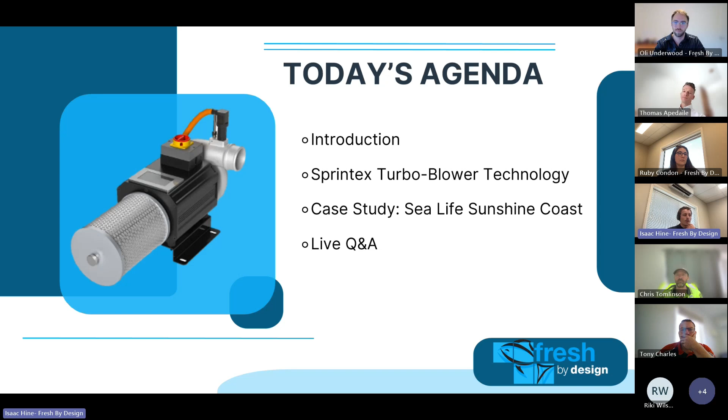I'll give you a quick overview on who Sprintex is - you may not have heard of us. If you go to the next slide.

Sprintex Limited, the company relisted in 2021. We're ASX listed. We specialise in high-speed permanent magnet motors. We come from a hydrogen fuel cell clean energy background, and we looked at that technology. We've done a number of significant pilot projects, but hydrogen uptake is not ready yet, basically. So we looked at the technology we had and thought about possible ways to introduce it to a wider range of applications.

Industrial blowers - commonly people are still using technology from 30 plus years ago, inefficient technology that produces excess heat and consumes oil. We thought we could do something different, something new: smaller, lighter, more energy efficient, and less maintenance.

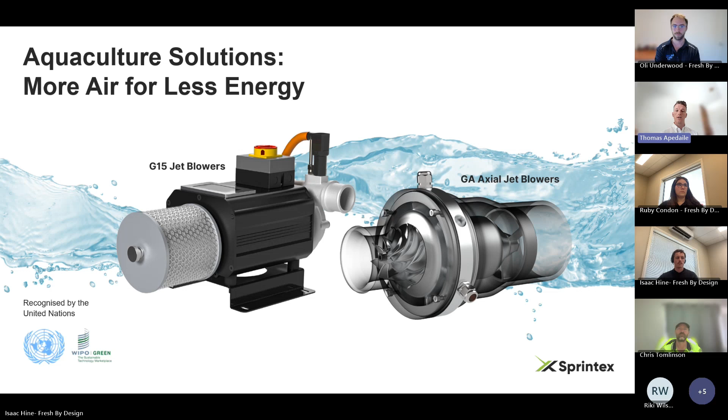Today we're going to talk about two of the product range. We have a bigger range than this, but this is more specific to aquaculture. So we have the G15 range, which has 4 configurations - that's the small one. And then we have a much larger axial flow jet blower, which is in another category essentially. The product's been recognised by the United Nations WIPO Green award.

That's for sustainable agriculture solutions - technologies to tackle climate change. They've recognised it for significant energy savings, which is fantastic for the climate. But you guys are probably all here to improve your profit margin, and one way to do that is to reduce your operational costs. Power in Australia is pretty expensive per kilowatt hour, and we can save a significant amount of power - so that's why we're here.

With the two ranges, the G15 can produce more pressure, giving you good pressure and good flow up to 13 cubic metres a minute between the 4 configurations. If you need a lot higher flow, we have a bigger machine, or you can run multiple smaller machines depending on the setup that suits. So the G15 is more for higher pressure applications and smaller systems - smaller tanks, hatcheries, small wastewater treatment setups - and the big machine will work for your bigger ponds.

What we do is we can provide one blower to multiple ponds. Next slide.

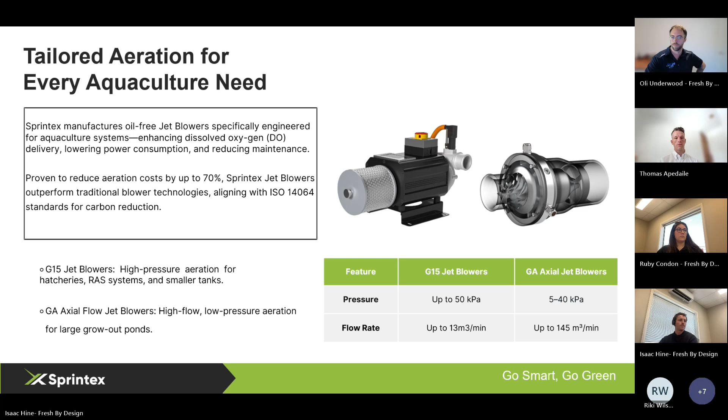All of the range is completely oil-free. I don't know how readily used rotary lobe blowers are in Australia, but in other markets they are a popular option - they require oil. Side channel blowers don't, but they're obviously very energy intensive. So we provide an oil-free solution. The only maintenance is essentially air filters - every 3 to 6 months, swap the air filter. We have a pre-filter that can be washed and reapplied, but there's no oil, so no risk of contamination.

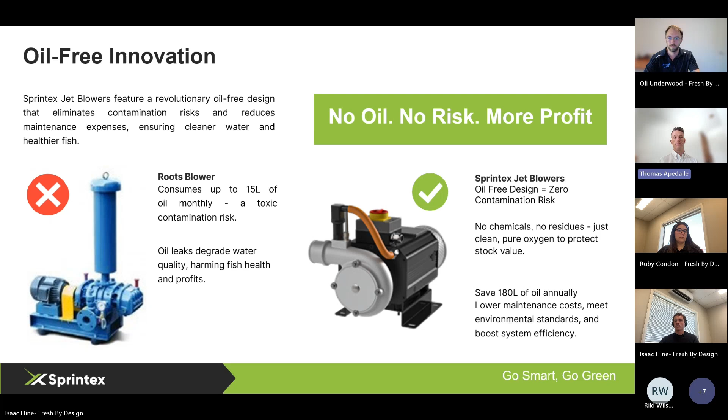So 12 kilowatt would go down to our 4 kilowatt, and our 4 kilowatt machine, that's the max power. They're all variable speed, no additional VFD. We use an inverter and it's running in DC. Just a touch of a button, you can adjust the speed to get the flow and pressure you require. They have auto restart functions, Modbus integration for third-party PLC systems. We can take inputs from your DO sensors to react to what you need, and the machine can speed up to provide more air or slow down to save energy.

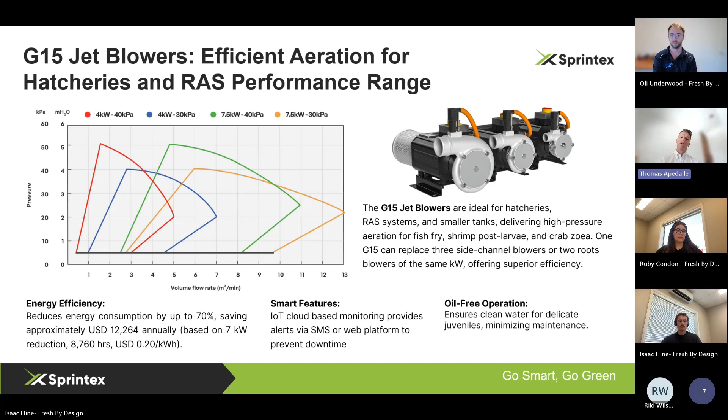All of that is on an integrated touchscreen or can be controlled by the third-party PLC. We can add IoT, Internet of Things connectivity, to provide alerts. In Australia, we can do email, not SMS, but in other markets we can give you a text message. You'll get an email if something's up and you need to see what's going on with the system.

As I said before, power consumption for side channel blowers compared to the G15 is about 3-to-1. So we replace a 12 kilowatt with 4 - it may not consume 4, it may consume 2.5 or 3. It just depends on the setup, but 4 would be the max power consumption. Even on projects where you're using a 5 or 6 kilowatt blower, you put in our 4, it doesn't mean you're going to use 4 kilowatts. It could use 1.8, 2, it depends, but it's rated to 4 kilowatt.

Then we have the 7.5, which we've replaced side channel blowers up to 22 kilowatts. Those side channel blowers are going to be over 120 kilos. You need an additional VFD if you want to control speed, control boards and other components, whereas our system is a plug and play integrated system. You can set it up on the touchscreen yourself or have it controlled by a third-party PLC. Everything is a single package - you just plug and play and away you go.

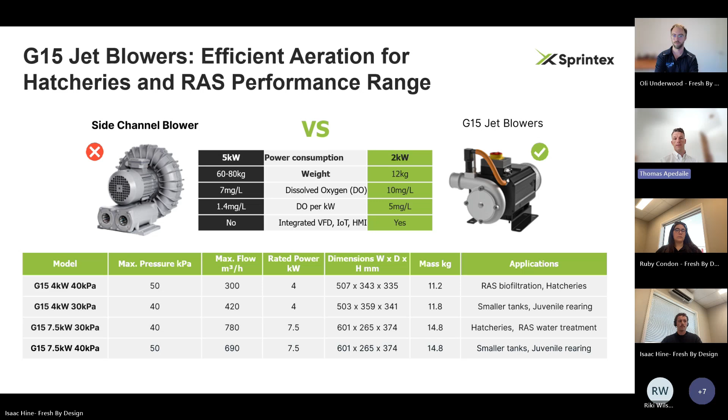And 12 kilos as well, so anyone can just pick it up, bring the box in, plug it in, and set it up. We're even okay with silicone connectors on the outlet, PVC piping. Due to the efficiency, the outlet temperature is going to be a lot cooler than other technologies because inefficiency is expressed as additional heat. In aquaculture, you may have to use stainless steel piping normally, which is expensive, but we can get away with PVC piping because the outlet temperature is going to be a lot less.

This is a fish farm in Turkey where they replaced 3 side channel blowers with 1 G15. Our distributor there has software and hardware to track the exact power consumption. They've gone from over 13 kilowatts down to 3.5, which is pretty significant if you scale that up at the prices we pay per kilowatt hour.

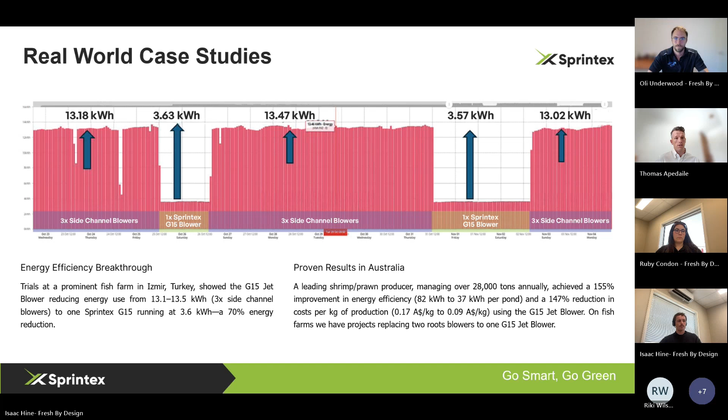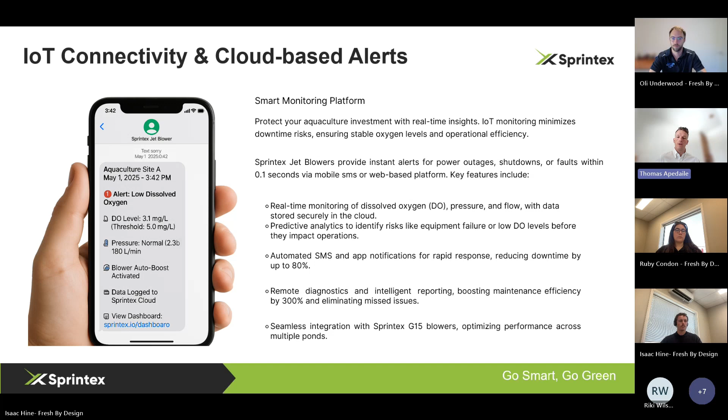As I said, we can monitor all of the blowers. If you choose to have IoT installed, Sprintex will be able to see the blower and see what's happening, and alert if there's any issues - automatic alerts via email if the blower's gone down or there's something going on that doesn't make sense, like the outlet temperature increasing over time, potentially meaning your filter needs to be changed. These are the type of alerts we can provide by monitoring every single blower in your fleet.

Now I'll talk about the axial flow range. This is a different style compressor head. You saw on the little G15, it had a turbo similar to a car turbo on the back of it - that's a radial flow. Both are centrifugal impellers, but the way the flow is pushed around creates more pressure on that system. This one has a more open style axial, like a jet engine from an aeroplane.

Both are super high speed in terms of RPM, 80,000 for a G15. But this one has more of an open style impeller, so the flow goes through the compressor head, and we get a lot higher flow at lower pressure - for projects with multiple ponds, degassing, or very shallow, low pressure ponds. This is the one where you could potentially replace multiple blowers with one. We have a conical diffuser that reduces the velocity on the outlet, and then you can connect multiple pipes to the diffuser.

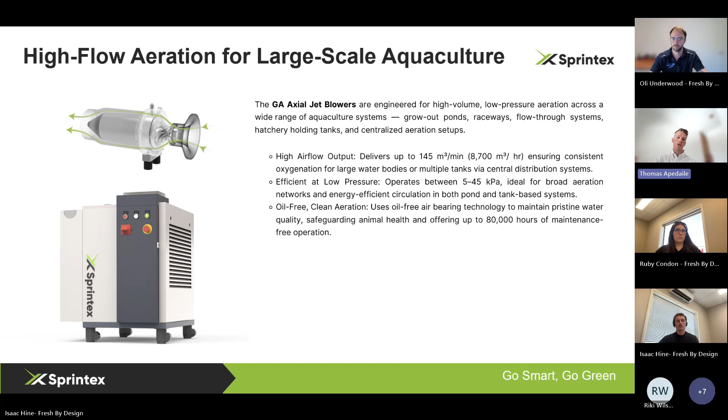We've seen projects where you can replace 15 side channel blowers with one of these in a bigger size. These are 5 of the size options, from 15, 22, 37, 55, and 75 kilowatt rated shaft power. This is a lot bigger machine, obviously more expensive, but if you can replace multiple units, you're going to save a lot of money because it's really efficient at these lower pressures.

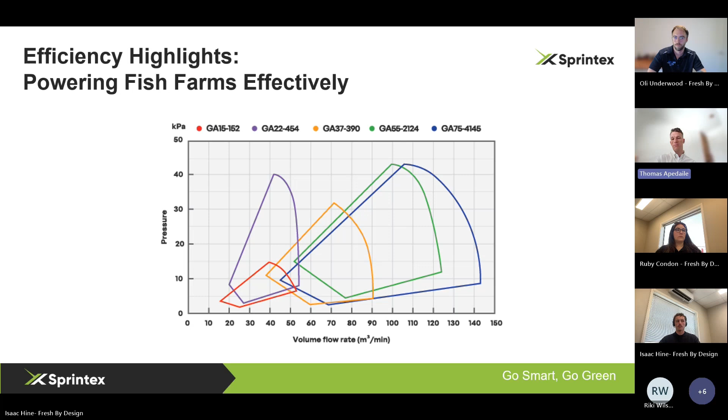We're still looking at the best applications in Australia, but in China there's a lot of prawn - they call them shrimp farms - where they have a lot of ponds. So smaller, medium-sized ponds, shrimp farming, larger RAS systems, degassing, shallow waterhead, lower pressure, high flow systems would suit this machine really well.

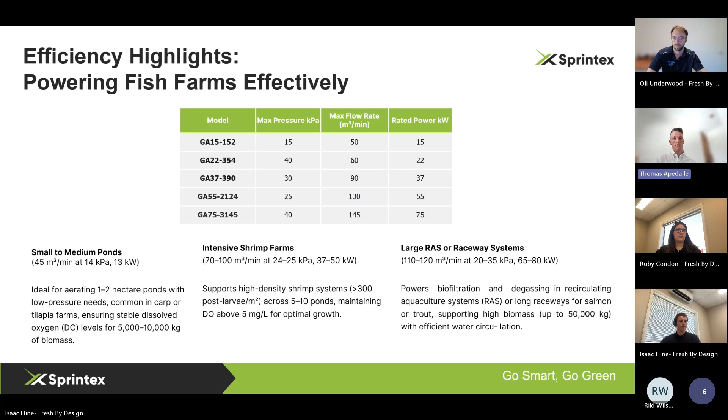Just to recap, it's been recognized by the UN for sustainable aquaculture and agriculture. We can save up to 70% in your power straight away.

We have a smart pulse aeration mode, which will pulse the water to save energy, basically constantly speeding up and slowing down the machine to grab the energy savings in between the slowdown, or it can just slow down based on inputs from your sensors, your DO sensors.

We have had data come from China where we looked at the DO of a side channel blower compared to our blower at the same flow and pressure, and the DO was significantly improved, and we think it's due to the outlet temperature being a lot lower. We want to do more investigation, but the price per kilowatt hour, just straight flow and pressure, like for like, is significantly less, but we also think there's a DO improvement as well.

The machine itself is really, really quiet. All of them are really quiet. So if you're replacing roots blowers, super noisy, or a centrifugal fan, it's really noisy, like over 82 decibels. Without even an acoustic enclosure, we'll be closer to the 70 dB.

For the G15, we do have an outdoor enclosure solution that will come flat packed if you need to put them out in the weather. You don't want them out in the sun or the rain, so there'll be a special enclosure for it. And as I said, we have the option to provide monitoring via IoT and extended warranties.

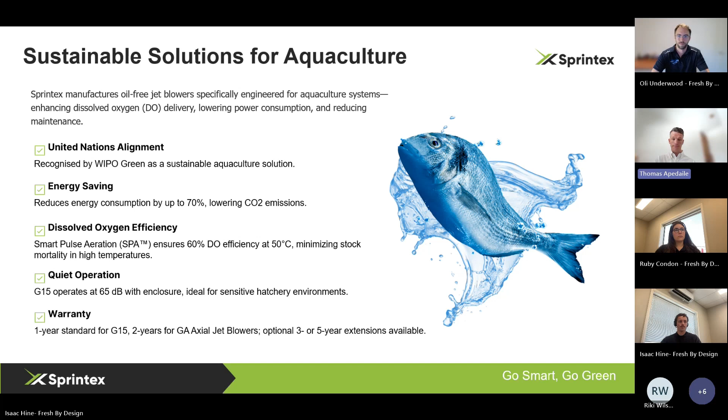Cool. Thanks, Isaac. Thanks, Thomas. So guys, as Isaac mentioned at the start, I was the curatorial manager for Sea Life Sunshine Coast, so I oversaw all of our marine operations. And so I've got quite a lot of experience in the operational sector.

Hopefully today I can let you guys know as an operator what it's like to actually go from a side channel blower to one of these units and what we learned along the way. Aquariums are typically quite old facilities, especially the Sunshine Coast facility. Trying to integrate a unit like this into an older facility, it's quite difficult to determine exactly what unit you require. I'll explain that along as we go as well.

I'll try and not go into too much detail on the specifications of the blower, given Thomas has done that for us today.

So first of all, the background of why we had gone with a change in unit - something for everyone here to consider is we were able to get some green energy funding by showcasing that installing this unit would show us a significant energy saving, and that's how we actually got the funding for this unit. I believe across multiple states there is some government green energy funding around, and there's several case studies now showcasing the success of this unit doing what it says on paper. So something worth considering.

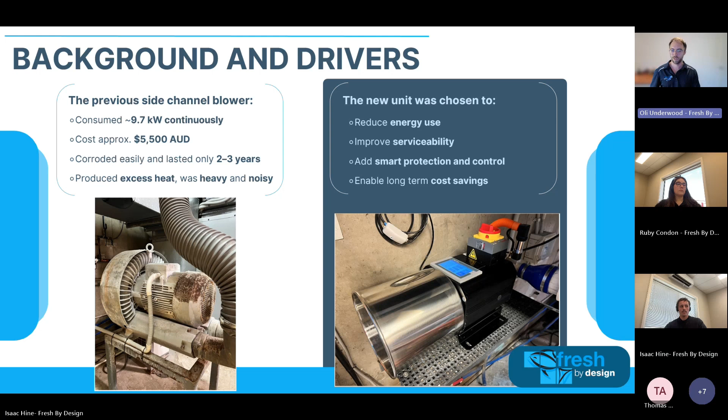So the cool thing with this unit as well, the first time I was introduced to one was through a company called Fresh that had come around and showed me the units. They had it in the back of their ute, and I thought that sounded a bit insane after dealing with side channel blowers. But he pulled it out and just held it in his hand, and I was like, there's no way that thing is going to do what it says. So it took me a bit of convincing with my management team at the time to say, look, I genuinely think this thing can push out the same amount of air as our side channel blower. Ultimately we got the funding to give it a go.

So comparing blower for blower, what we started with was an 11 kilowatt side channel blower. It was consuming, when we tested it, about 9.7 kilowatts. The weight, I've got it listed as 191 kilos, maybe a little under. The noise, 84 decibels we measured - very loud. The new blower, we got it down to about 71 decibels. We did have a few other LSS components in the room, so it was probably a bit quieter than that. By the time I left Sea Life Sunshine Coast, they'd had that unit in there for about a year, and it's going great still. But the old unit, as I mentioned, we were having to replace every 2 or 3 years.

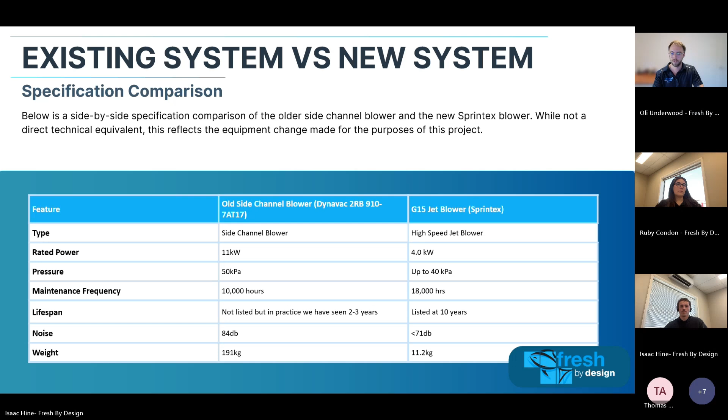I won't go through this one because this really just goes through what Thomas has explained.

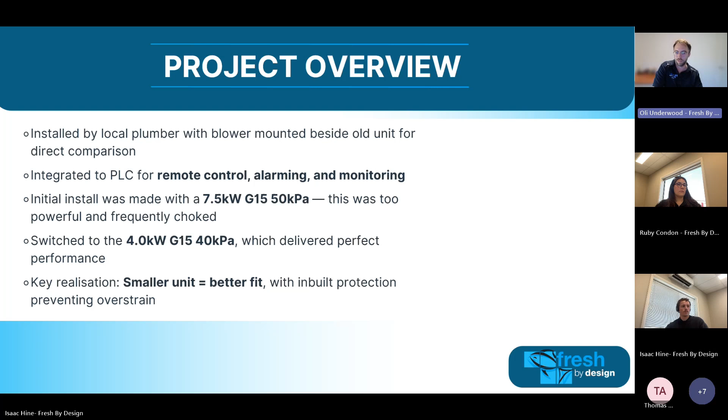For us, the first thing we ran into with this unit is we initially didn't have the figures on what we actually required from an air point of view. So we thought the easiest thing to do is just get the biggest one, since on paper it still had a bit smaller output than the existing side channel blower we had. We thought worst case we could just dial it down a bit. The reality is, when we got the first unit, a 7.5 50 kPa unit, we found very quickly it kept choking out on a high pressure alarm. It turned out the unit was actually too big, which was not something we had ever considered. We assumed worst case we would just dial it back, but we literally couldn't dial the larger unit back enough to meet our air requirements. So we did some troubleshooting with Isaac and Thomas at the time, and quickly realized we actually needed the smaller unit. We got the smallest of the range, I think it was the 4 kilowatt 40 kPa unit, and installed that, and it was perfect immediately.

The actual savings we found, as I said before, we were pulling 9.7 kilowatts on our old unit. When we tested the G15 - and I say tested because it's got an inbuilt display that gives you all these figures, which is really nice - we could get it operating, pushing the air we needed through all the displays and tanks, and we were getting 2.7 kilowatts on the screen, which was a massive saving from 9.7. The energy savings from a cost point of view, our existing unit was costing us about $11,500 to run, whereas the estimated cost to run the new unit was just over $3,000, which is huge and pays for itself very quickly.

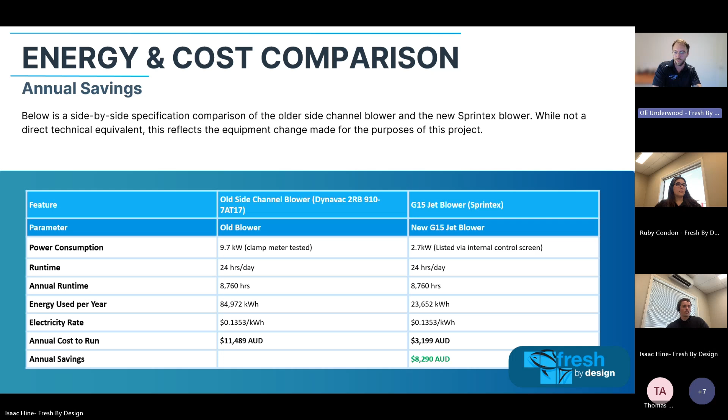This was something we put together to showcase 1 year of savings. You could say a savings from the old unit of about $8,000 sounds great, but when you really consider what that looks like over a decade, you could be talking absolutely huge money. And we were just a facility with one small unit, whereas some facilities, as Thomas mentioned, could be dealing with dozens of units.

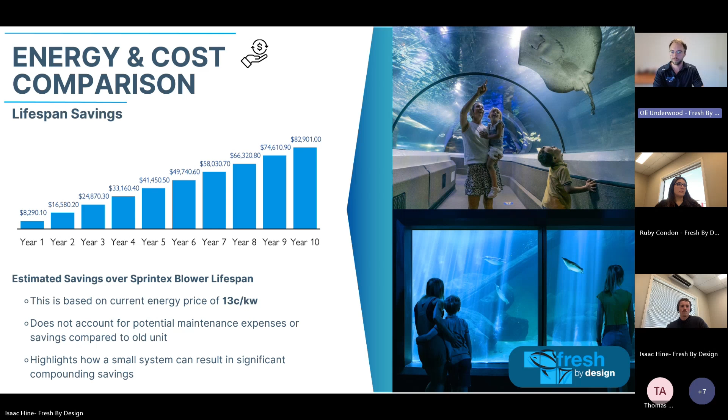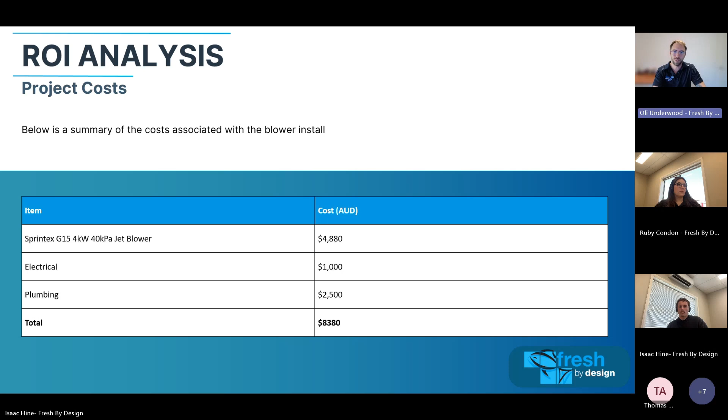The full installed ROI - the reason I put this is to showcase what it could look like if you're bringing external contractors to do the install for you, which is what we did. We had an electrician come in and do some modifications. We actually had a PLC system operating the aquarium, so we were able to connect it into that as well, which would manage - we could adjust the flow, we could get alarming all through the PLC, which was nice. But even with all of that, even with the plumbing install, we were still at an ROI of about 1 year.

So I guess some of the lessons learned, especially from an operational point of view, it's rare that everything goes perfect. The obvious things that went well was the simple install. This thing got delivered at reception, and I was able to pick it up myself and take it downstairs, which would have been quite an ordeal if it was the side channel blower arriving.

The energy savings, once we got the unit installed, it was quite clear this thing was working very well, and very easy to manage. The filters, very simple. We could do that even with our general operations team, rather than having the maintenance team do additional work. It was a very easy unscrew to remove and change the filter out.

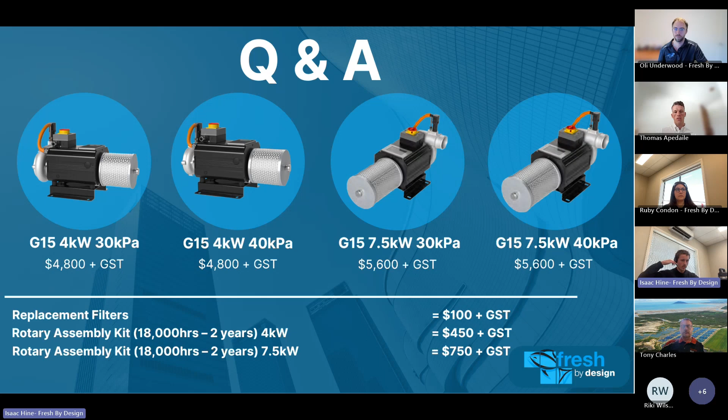Alright, well if we don't have any more questions, then we'll wrap this up. So yeah, thanks everyone for your time today. It was great to showcase this new bit of technology that we think has got a lot of promise in Australia and New Zealand to replace a lot of the side channel blowers that are currently in operation, and hopefully save your operations a fair bit of money in the long run.

So do reach out if you are wanting any pricing or any further information. We tried to keep this relatively short to keep it at a summary, but we can size any applications that you might need. We work closely with Thomas at Sprintex to make sure we try and get that sizing as accurate as possible. Obviously it's pretty new technology, so we are still learning it ourselves, so we'll be able to work through with the best information that we have at hand. All these models are currently stocked in Australia, so they are readily available at the moment.

Yeah, and the other thing is we can provide the absorbed power calculation before you get it to site. So if you're considering swapping something old, that'll help you figure out how quickly you're going to get your ROI. Because we can give you the absorbed power based on the compressor map for that working point, if you know the working point. Otherwise it can be a little bit more rough - a third of the power for side channels and half the power for roots. But if you want the exact power consumption, we'll just want to know your flow and pressure.